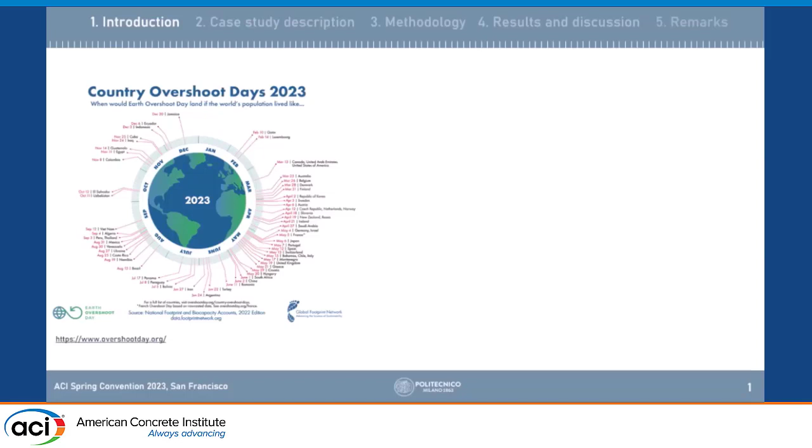So looking at also what Professor Coppola was saying, that maybe we don't have big alternatives to Portland cement, so what we can do, we can cut by half, very simply. But nobody wants to do that, or at least nobody wants to do that in short time. So in the meanwhile, we have to do something.

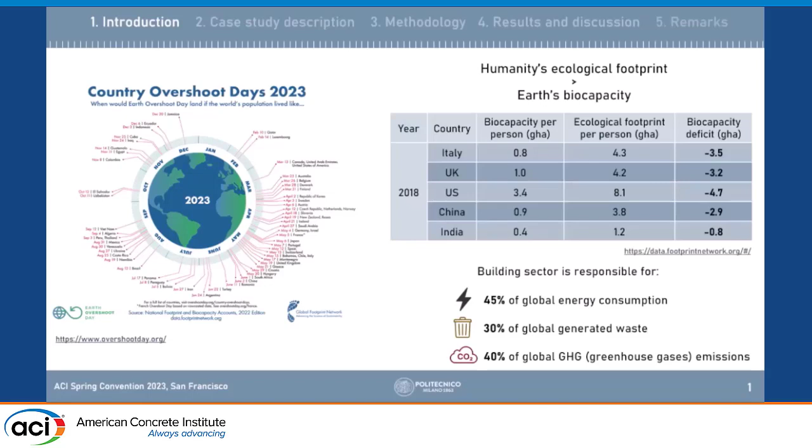Of course, there is a problem that some countries can produce more, but they also spend more. And as was said at least a couple of times today, the building sector is under attack, because it's responsible for a lot of global energy consumption and also greenhouse gas emissions. So what is one of the strategies? It's not the solution.

One of the possible strategies is, for instance, looking at timber hybridization with concrete. There is a lot to do here because we need to investigate which are the hybridization techniques, which means not only the single structure element is the point, but the construction system.

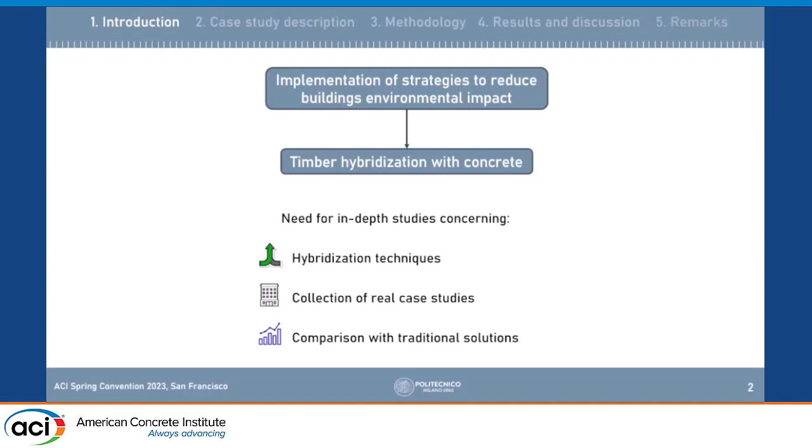We look a little bit at construction system today. We need to collect real case studies. We'll see we don't have so many, and we have to compare with traditional solutions, otherwise it doesn't work.

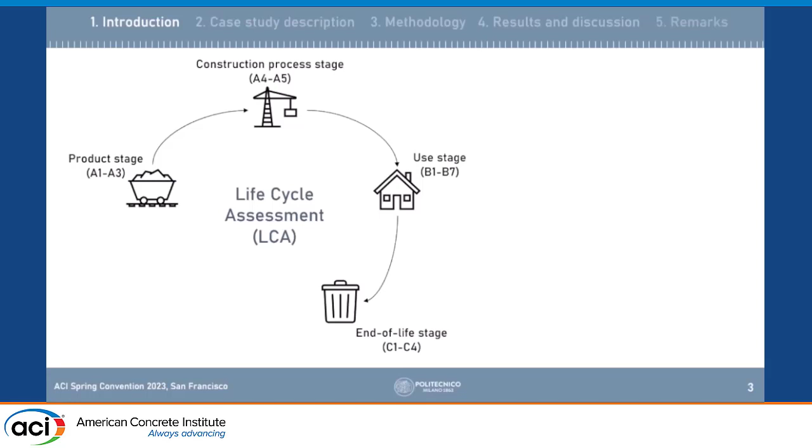So very quickly, it was also mentioned, this circle by Professor Riva. So we know which are the stages of life cycle assessment. We typically tend to consider stage D, which is beyond system boundary, as optional, but we really could not do that anymore because it's quite fundamental.

If you look at timber, for instance, it's quite interesting to see this, because it is one of the things which could make it work, in the sense that if you reuse, then you go negative in terms of GWP. If you recycle, you go negative. If you go to incineration, not so bad. If you go to landfill, no way, we are back. So this is a scenario which we cannot consider under any circumstances.

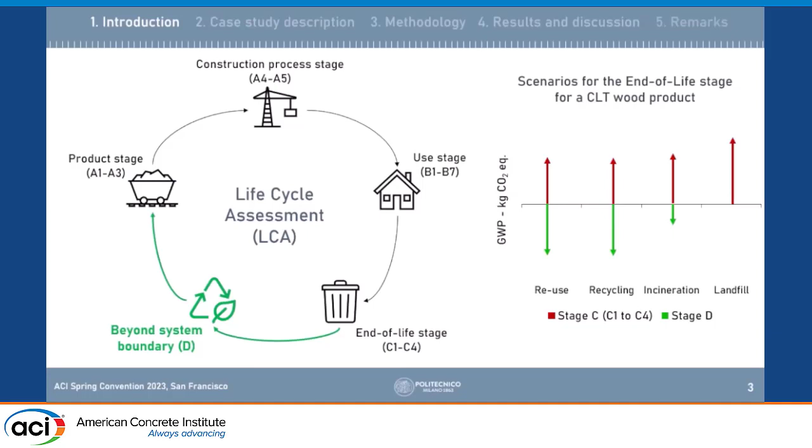Let's look at the big solution. So this is a European seismic hazard map where there are some buildings superimposed. Here you can see this legend. Basically, the green ones are with reinforced concrete core, while the other ones are with timber stability system.

It's curious because when I showed this in Europe, some colleagues look very well, because if you look where you have spruce, it's not where you have seismic hazard. So nature is giving a call in Europe, right? And in fact, the highest buildings which have stability systems in timber are all located in parts which are not of significant seismic hazard.

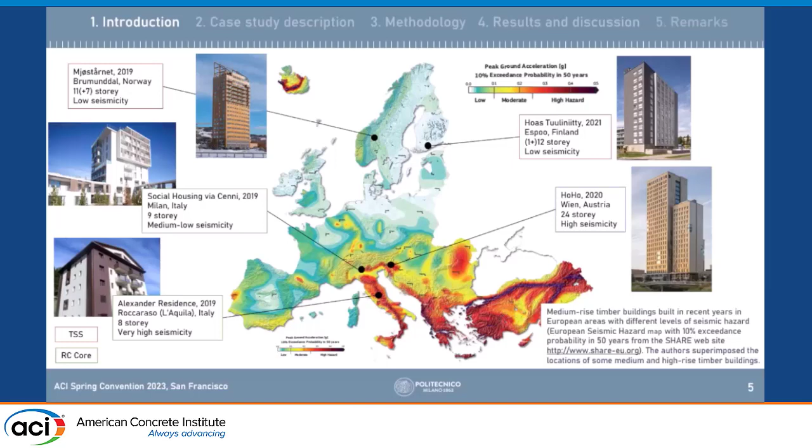It's a little bit different here in North America, because actually one of the few places where you have high seismic hazard and a lot of timber is basically here, from California going up to British Columbia. And in fact, if you look here, when we start to go a little bit up, higher than 4 stories, there is no way, basically.

So the stability system is reinforced concrete. There is actually, well, this is a few blocks down here, and this is in timber, but we cannot go higher than 4 or 5 stories. And when you have a high-rise building, now this should be the highest timber building in the world, in Wisconsin, where I would not say it's really a seismic prone region.

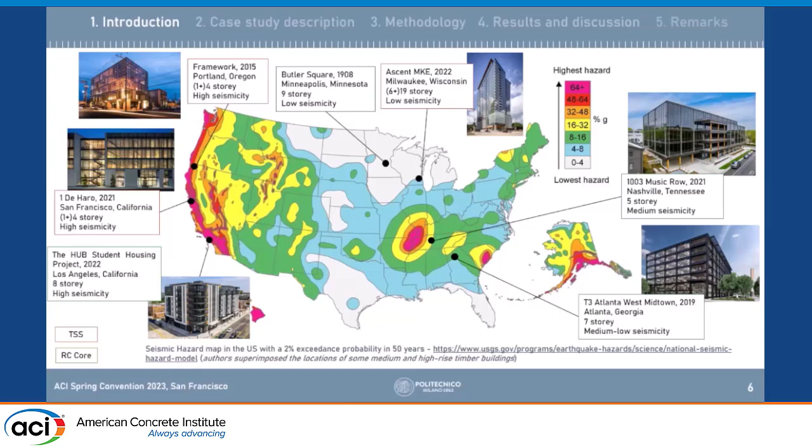So how can we approach that then? This is from a previous work which we presented at a conference relatively recently, where you can see this is a summation of all the contributions from the different stages for buildings which are comparable.

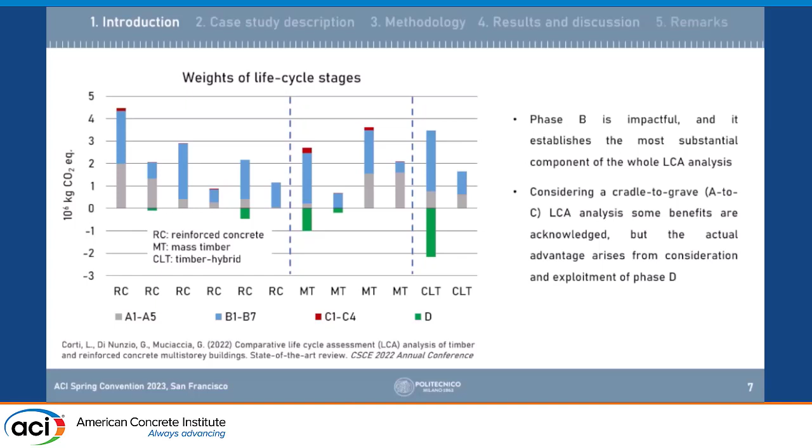It's quite hard to find literature on this information for buildings which are more or less the same size. These are some buildings in reinforced concrete, these are mass timber, and these are with CLT. You see that for some of them, when you consider stage D, you can go a little bit negative. But as Professor Ferrari recalled earlier, citing Professor Scrivener, we cannot replant India every year. So we need to do something like that.

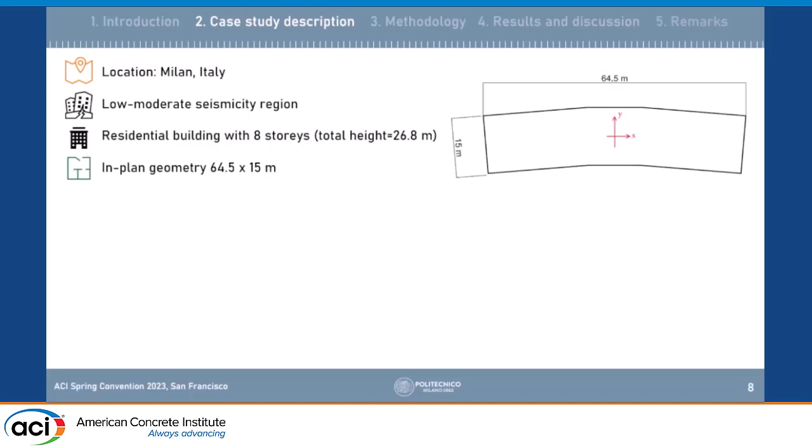So the case study: we try to apply this to a real case in Milan. We consider this building, which is quite medium size, 64 meters by one side and 15 on the other. It's 8 stories, so not so small—it's mid-rise, and it's in Milan, which is low to moderate.

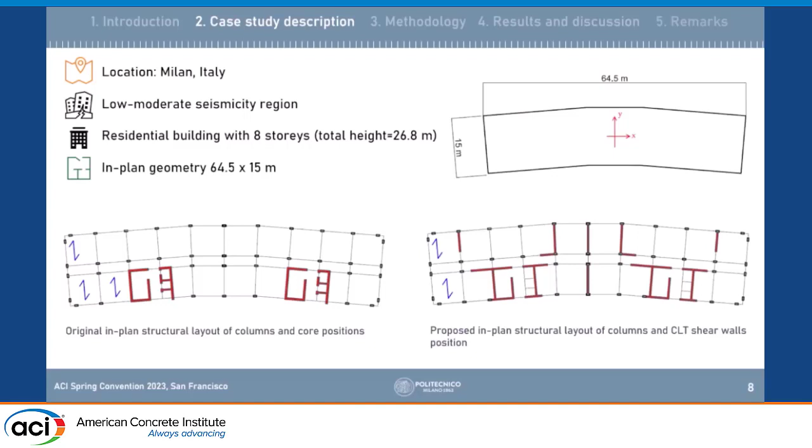One point here: in this case, the columns are in steel. It's absolutely not convenient to talk about timber here, because as you go up, the size of the timber column would be 80 centimeters, and nobody would want to lose all that room. So you go with a 24 centimeter steel profile, end of story. We'll see later that this has really no impact on our environmental indicator.

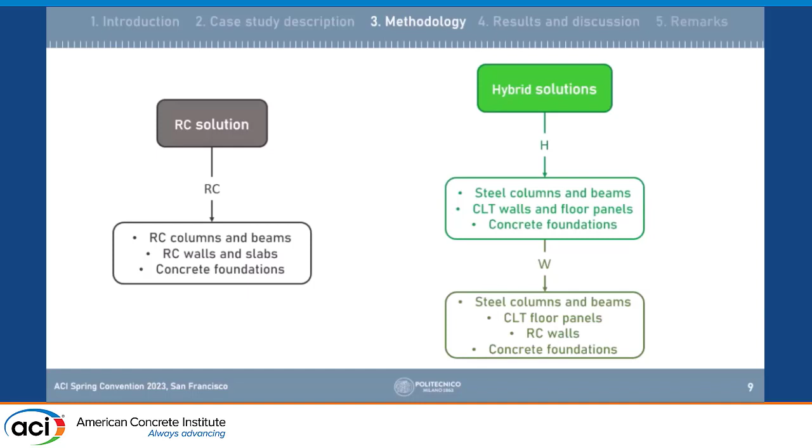So what we consider is the reinforced concrete solution, which is classical. With this hybrid—well, hybrid meaning that steel columns and beams are given for granted—we use CLT walls and floor panels. Another solution is when we replace the stability system, so from CLT walls to reinforced concrete walls. Very quickly, this is just how we evaluated the impact indicator.

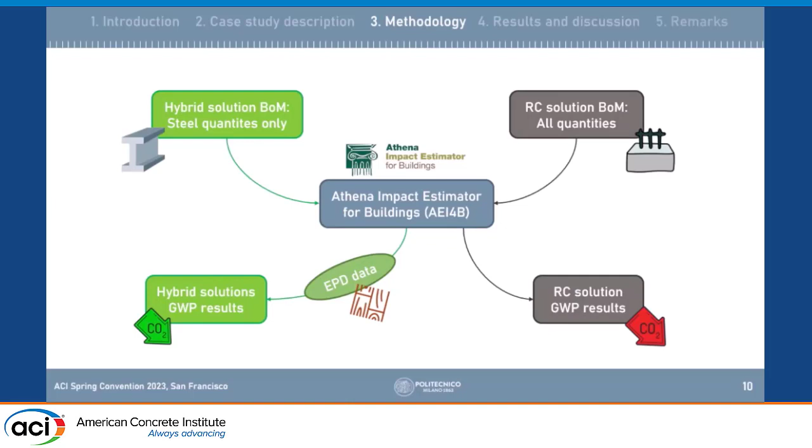So automatically through software and looking at EPD data for the panels. Which are the solutions? No worries, it's quite easy.

So we have the reinforced concrete classical, when you recycle nothing. Then you have the hybrid when you reuse everything, the hybrid when you recycle everything, then the hybrid when you go to landfill, and something which looks a little bit more reasonable, in the sense that it's not really thinkable of reusing everything from the panel, because you have to make some adaptation.

So this is a solution when we reuse the majority, but the rest goes to incineration. And to make the final comparison, we are considering one final case when we do not replant—so we don't have India available, we do not replant, and we see the effect. Because at the moment, the item which really has lots of impact when you consider LCA for timber buildings is the assumption that you have something stored at the beginning, because you have a replantation.

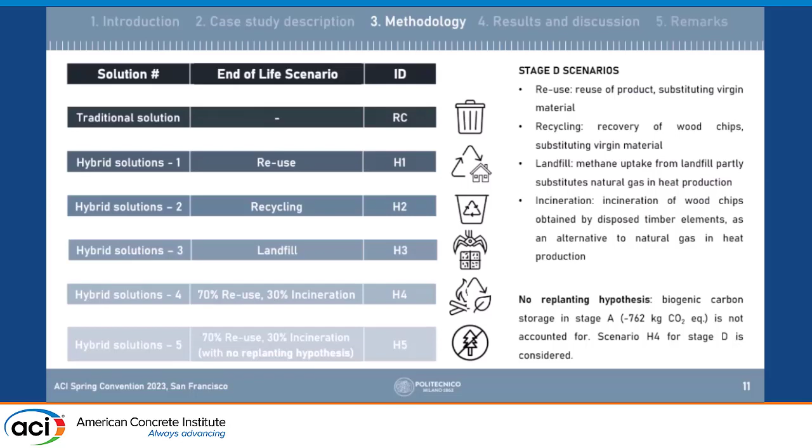So which are the other variables that we consider? One thing: typically in this comparison we neglect stage B, which is the use phase, but this is the phase which is more responsible for emissions. In a low energy efficiency scenario, this is responsible for 80%. So we are fighting on the structure, which really may not have much impact. So we also consider another scenario where we have high energy efficiency, where stage B is only 60%, and we see what the impact is.

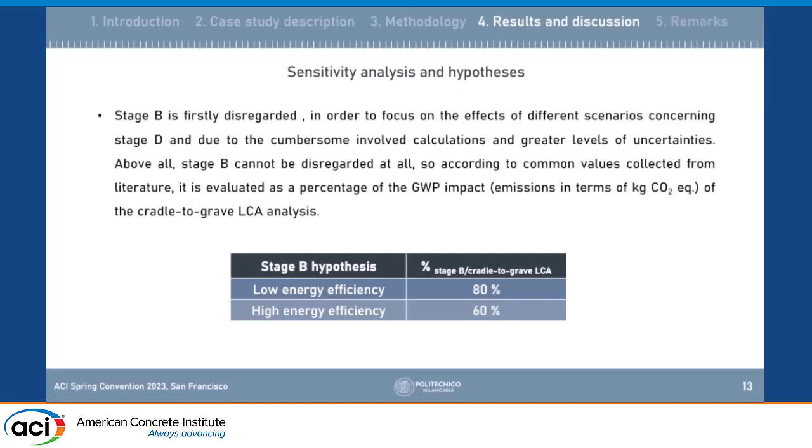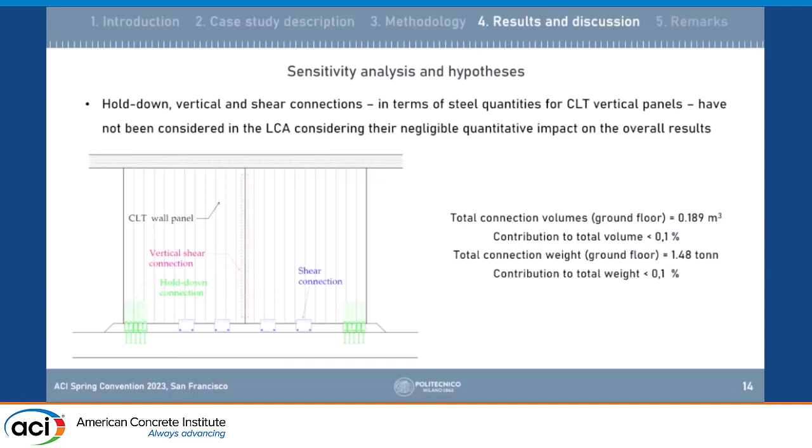So if you want to go to a solution which maybe can be a mix, it can be a good compromise in terms of erection speed, usage of floor, and to balance a little bit the emissions and use of resources. It can be very efficient to work on slabs, which is what is done, for instance, by this hybrid solution.

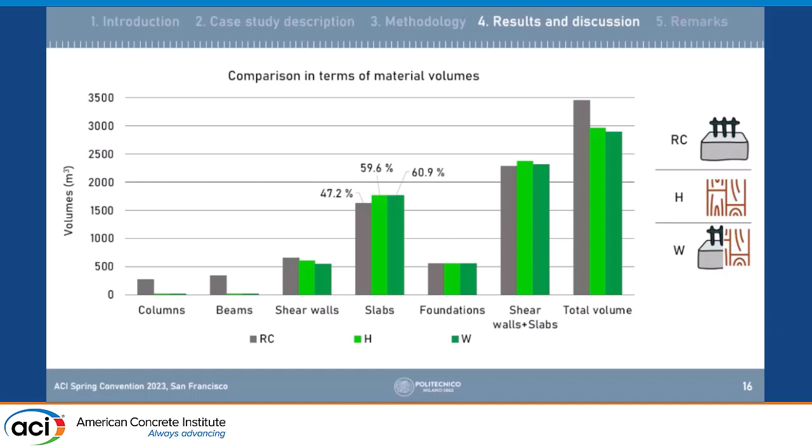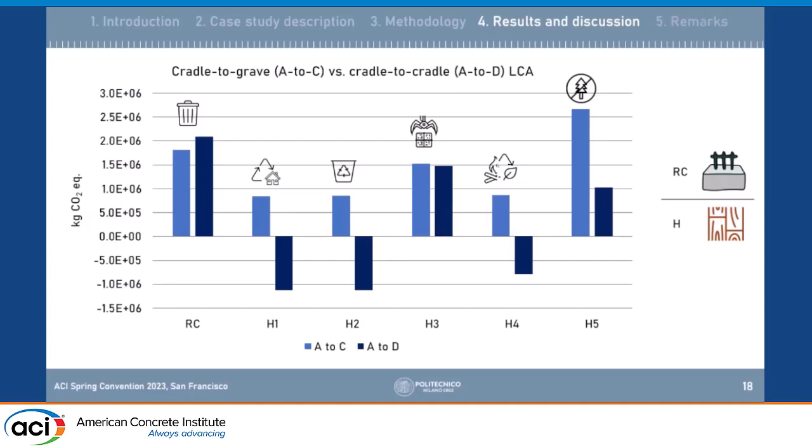Give some thought, right? So again, if you don't have replanting and over here, maybe this is not the more efficient option. So this is just to say that this is not the solution, but probably we need a mix of that. Finally, before the conclusion—I think I'm on time.

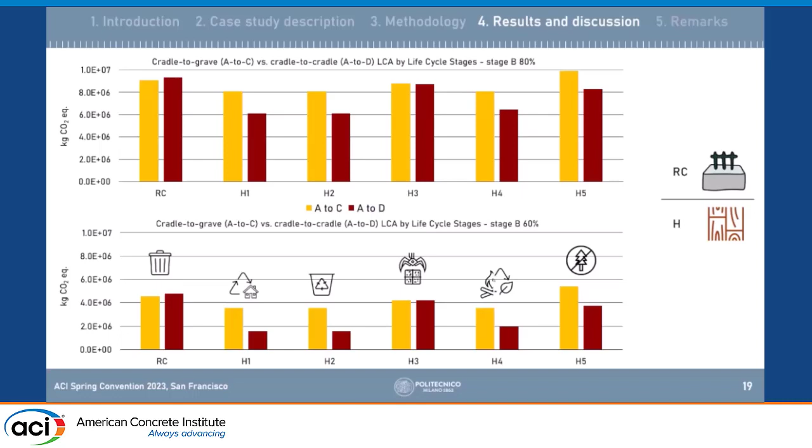Just to take a look at the fact that we have an impact if we consider stage B, which impacts for 80% of emissions, right? But we really need much more energy-efficient buildings to see a difference among the different strategies, because otherwise, whatever the strategy, if your building is not efficient, there's some difference, but it's not tremendous.

In conclusion, we need accurate design—building efficiency is crucial, as we said.

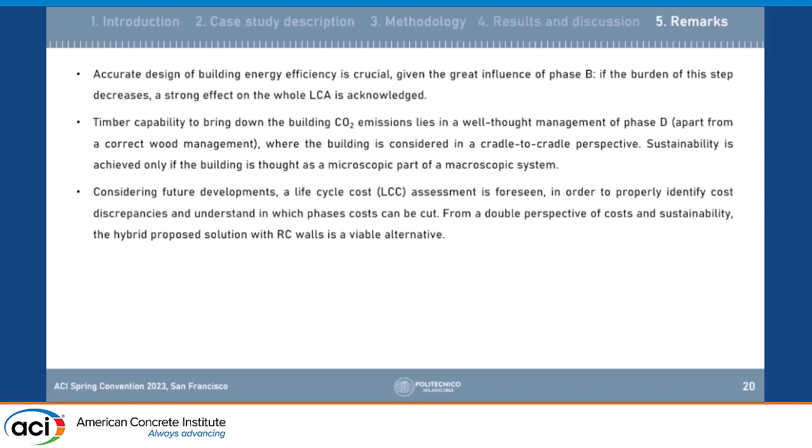Timber capability to bring down CO2 emissions lies in well-thought management of phase D, and we can achieve sustainability if we consider this as part of a larger system. Of course, we had to consider cost on top of this, because right now this analysis is neglected. And last two points.

It is not possible to take advantage of negative CO2 emissions in case the panels are not reused or recycled. And in this case, the choice of hybrid frame resulted not suitable.

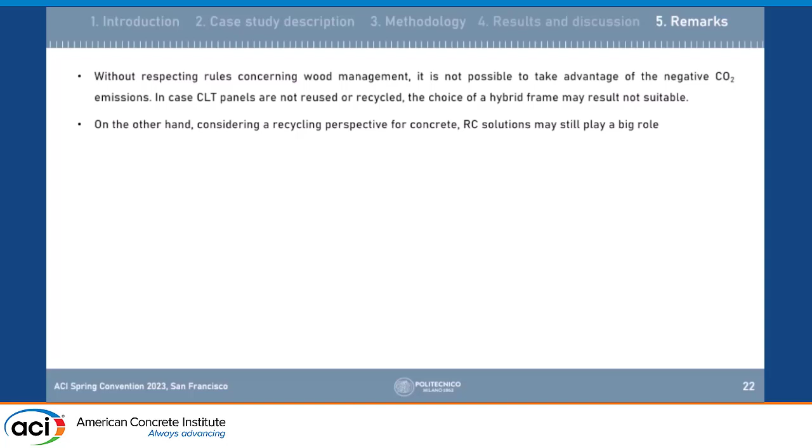So just to give the idea that again, there is no single solution, there is no one single strategy, and hybridization looks very promising to us, but there are many things to consider, and we need to be a little bit holistic, as we used to say.